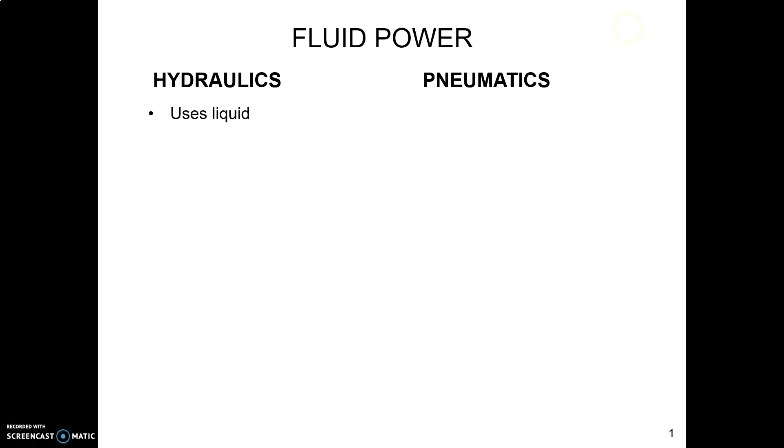Hydraulics and pneumatics are both kinds of fluid power. Hydraulics is a system that uses liquid. Pneumatics is a system that uses gas. In hydraulics, that liquid is usually oil. You do see some weird systems with other kinds of materials, but usually it's oil. Pneumatics uses air.

In a hydraulic system, we reuse that oil. So we've looked at how the oil gets returned to the tank, and then the pump pumps the oil back out of the tank and out to the system again. In pneumatics, the air is exhausted. That is, it's released. Once you use the air once, you just release it into the air and that's it.

The thing about liquid, like oil, is that it's incompressible. You can't compress it. While air is compressible. With oil, having this fluid that is not compressible, you can control it with precision. With pneumatics, using air, because air is compressible, it's kind of like working with a spring, it's less precise.

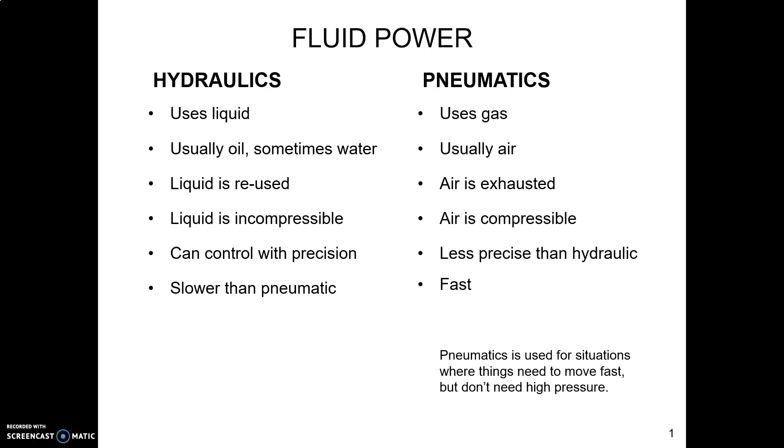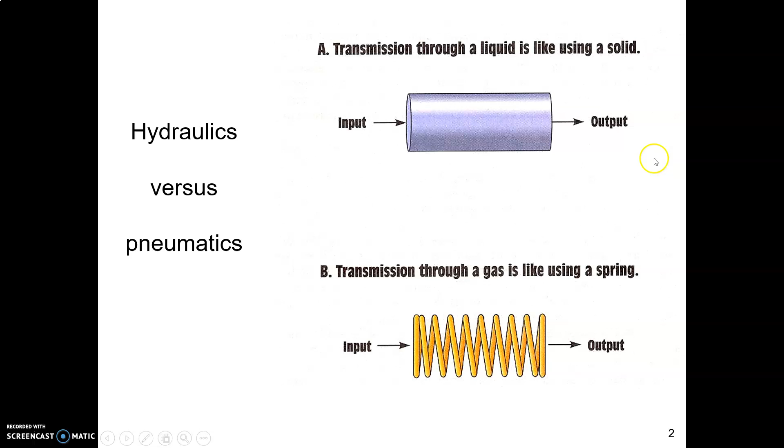The basic idea, the difference, is that when you're transmitting force through a liquid like oil, it's like you're using a solid because it's not compressible. Whereas when you're transmitting force through a gas, it's like using a spring. So that's why pneumatics is less precise than hydraulics. Also fast.

Pneumatic systems use a lower pressure than hydraulic systems. So think about what you know about the relationship between force and area and pressure, PSI. If you have a lower PSI in your pneumatic system, that means the cylinders have to be bigger for the same load that you're lifting or moving.

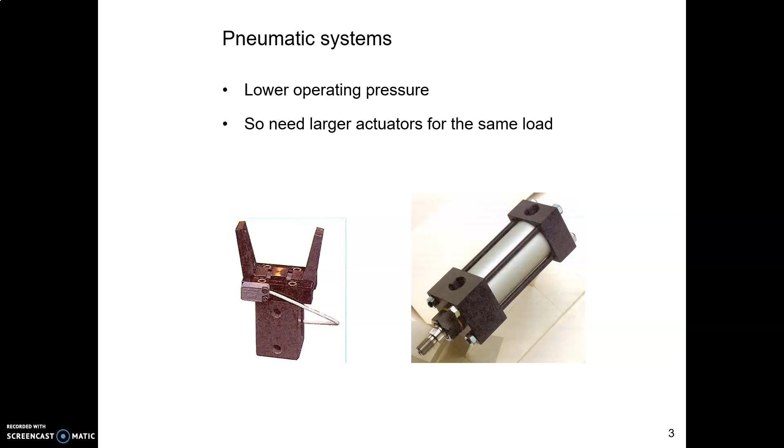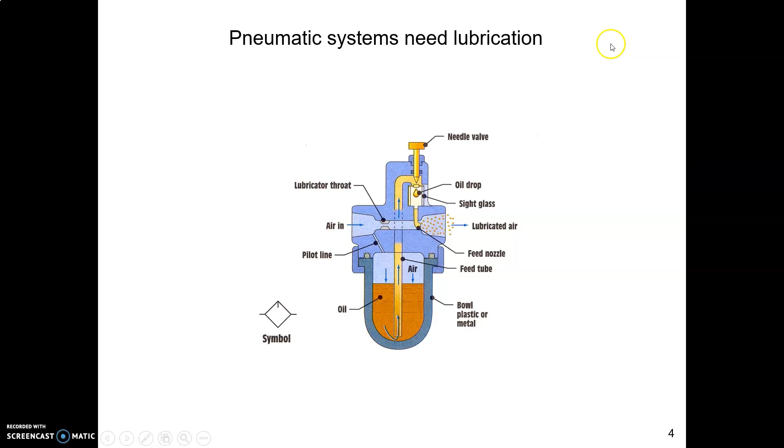Also, pneumatic systems need various kinds of air conditioning. We need to remove moisture from the air, and we need lubrication, oil droplets, oil mist that's squirted into the air. We don't have that in hydraulics. So in a pneumatic system, the fluid is just air that is all around us. It's free. And you don't have to reuse it, you just use it once and exhaust it.

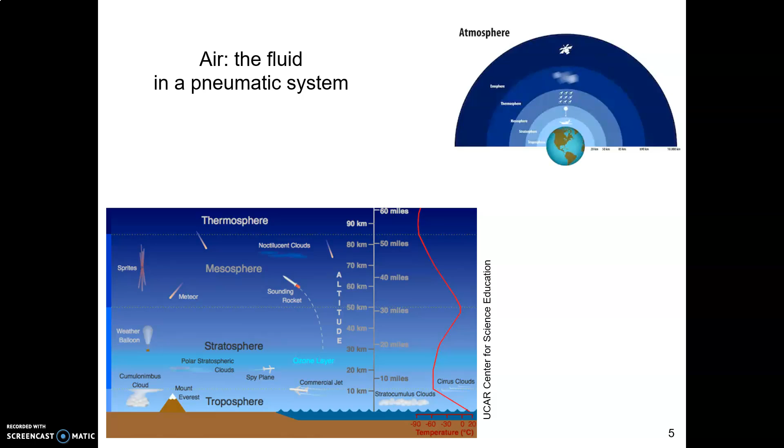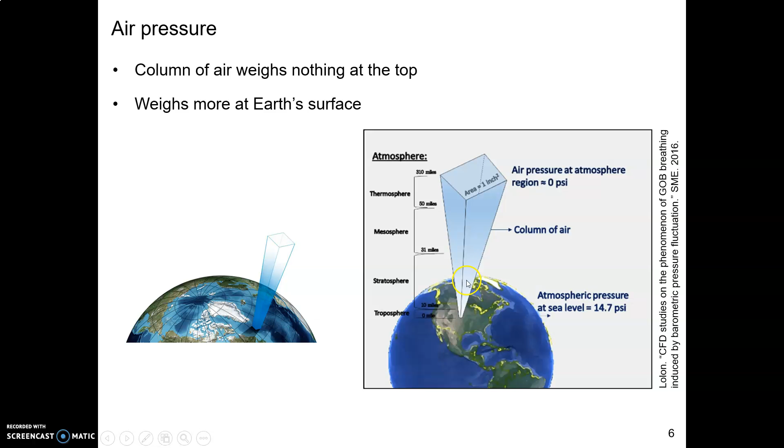Thinking about air that surrounds our planet. Like anything, air is heavier the deeper it gets. So when you are up at the surface of the atmosphere, you're at the end of the atmosphere, no more air. Up there, think about a 1-inch square column. It doesn't weigh anything. There's nothing above it. As you start to go down that 1-inch square column, there's more and more air sitting on top until you get down to sea level. And at sea level, that 1-inch square column of air happens to weigh 14.7 pounds.

Think about what you know about pounds per square inch, or PSI. At the bottom of that 1-inch square column, that thing that weighs 14.7 pounds is, in other words, 14.7 pounds per square inch, 14.7 psi. That is atmospheric pressure. And it's nothing more than just how much a column of air weighs that goes all the way from the surface up to the end of the atmosphere.

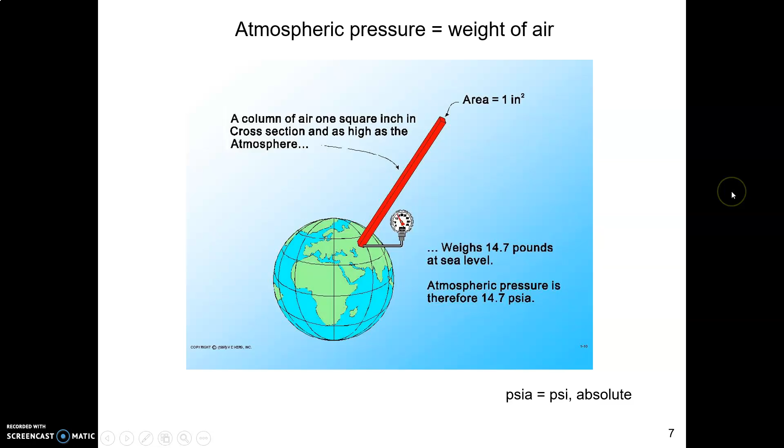And notice this slide is using the term psi-A, psi absolute. And the reason for that is that when we put gauges on systems, we don't really need to know that atmospheric pressure is 14.7. Thank you very much. We know that, and that's what it is all around us, unless we're at a high altitude. So what we really want to know is how high is the pressure above atmospheric pressure. And so our gauges start with their 0 point at atmospheric pressure.

When you look at a pressure gauge and it says 0, that actually means the atmospheric pressure of 14.7. If you're including atmospheric pressure in something, you call that absolute pressure. If you have a gauge that just starts at 14.7 as the 0 point and goes from there, that's called gauge pressure. And so we write those psi-A for absolute and psi-G for gauge pressure. And gauge pressure is what we use in all our fluid power systems.

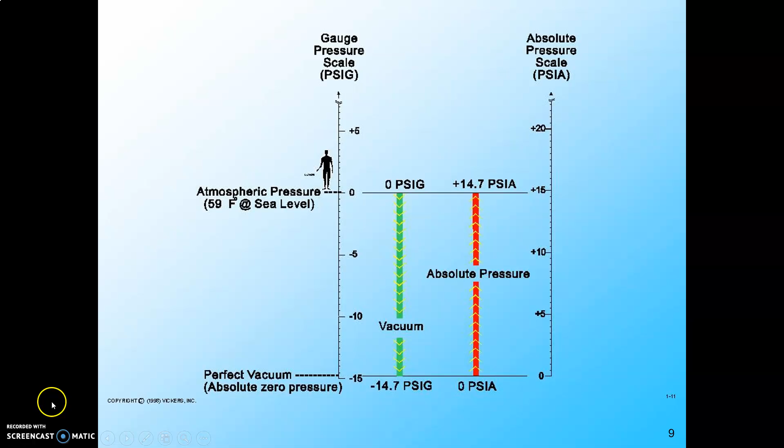So when you look at a gauge on a system, it is telling you how high is this system above atmospheric pressure. And then just in the interest of thoroughness, the gauge pressure starts with its 0 point at atmospheric pressure. You can also have a vacuum. There are gauges that read how far below atmospheric pressure we are, which means you have a partial vacuum. And we won't talk about that here. I think I do mention that in the optional slides after this one, if you want to look at gas laws and inches of mercury and vacuum. But what we really want to know is gauge pressure starts at atmospheric pressure.